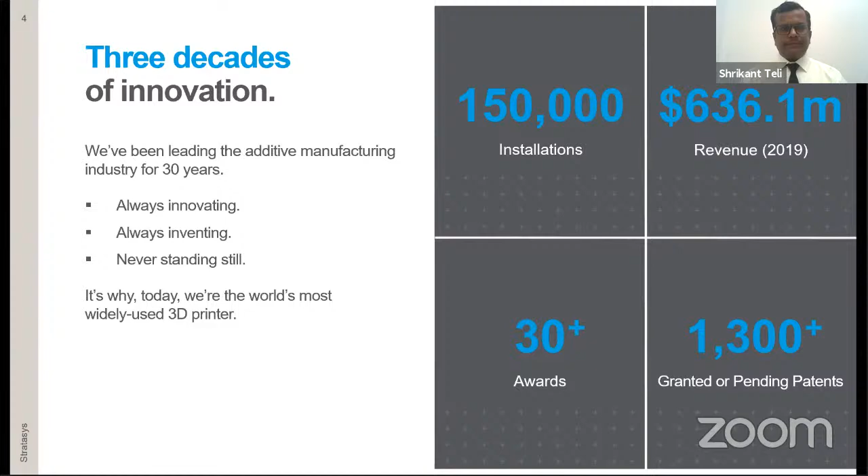Globally, we have more than 20,000 plus customers, catering to different industries including medical and consumer durables. Of course, 3D printing is predominantly used by automotive and aerospace, but now the extensive usage during this time is not only for automotive, aerospace, and consumer durables—the medical and healthcare segment is also getting benefited by using this technology.

When I say globally 20,000 customers, in India we have been operating since last 21 years, with more than 800 plus clientele base, 600 plus customer base, and 800 plus installations.

When it comes to the healthcare segment in India, companies like Boston Scientific and Stryker are using our technology for the benefit of the community. And on the innovation side, innovative companies like GSK, Bajaj Electrical, L'Oreal, and IAB have been using our technology for more than a decade.

How our industry has helped during the pandemic situation—I would like to invite Mr. Ganesh Babu to take this ahead and explain how we have helped during this time. Ganesh, over to you.

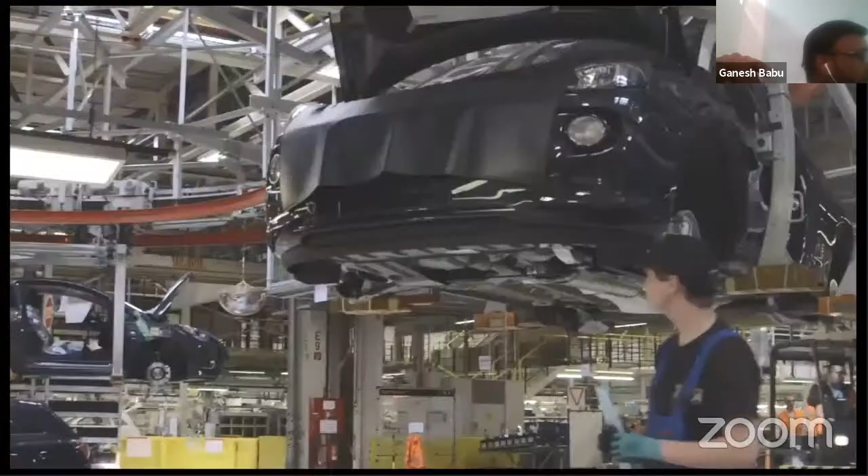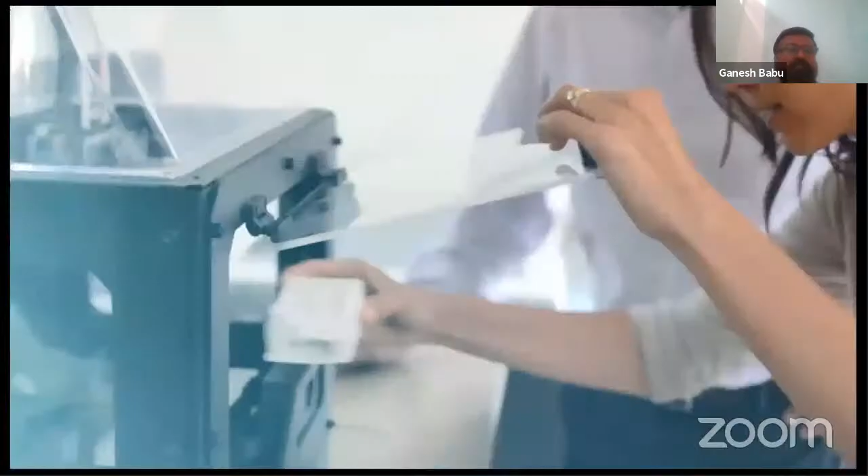To skill and industry to grow. We are shaping innovation, creativity, discovery, education, imagination, and the possibilities of tomorrow. Stratasys, the 3D printing solutions company.

I apologize for the audio disconnect due to connectivity issues, but there are quite a lot of other videos that will be relevant to today's agenda. Today we'll be talking more importantly about the current pandemic situation, which has been supported very well, and how Stratasys has been a front runner in coming forward to associate with partners and customers, providing necessary digital data files or CAD data and supporting in printing parts used either for face shields or for PPE equipment. There's quite a lot we are going to take a look at in today's overview.

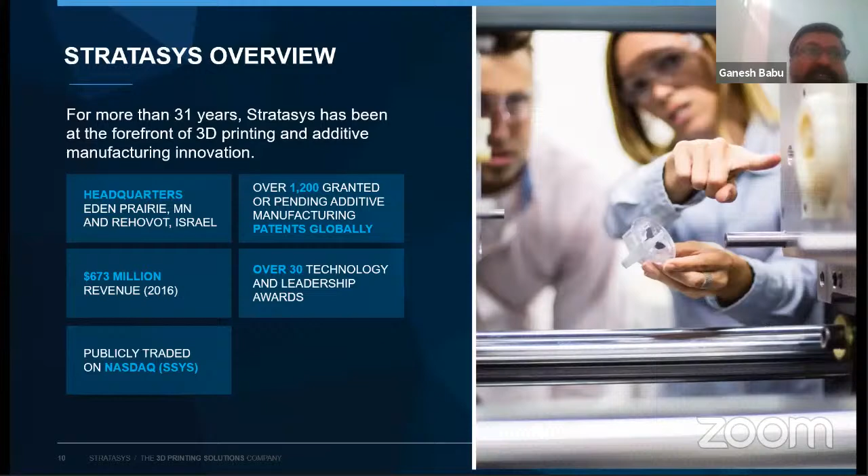Just to add to the Stratasys overview, over 3+ decades with dual headquarters at Eden Prairie, Minnesota in the US, and Rehovot, Israel. We have dual technology offerings from Stratasys—both core technologies for additive manufacturing that complement each other, and more importantly, bringing that Indian touch to whatever Additive has been doing.

Here we have the tallest, grandest Iron Man, our Sardar—this statue. Before even the consummation of this particular statue happened, we were able to use Stratasys technology to print a scaled down model and present it to the people around, who were able to keep that as a physical reference for creating such a mammoth statue.

While we talk about industry adaptation to additive manufacturing, there are endless possibilities across multiple verticals, starting from aerospace, automotive, entertainment, and the fashion industry. All of them are well associated with Stratasys technologies today, having realized the true benefits of using additive manufacturing in their line of work.

The vertical segmentation for fashion technology covers quite a lot, whether it's figurines or fashion accessories, which can be very creative. All of these are well addressed and achieved. I've got a few slides covering the fashion front as well, apart from the medical applications that will be covered in this presentation.

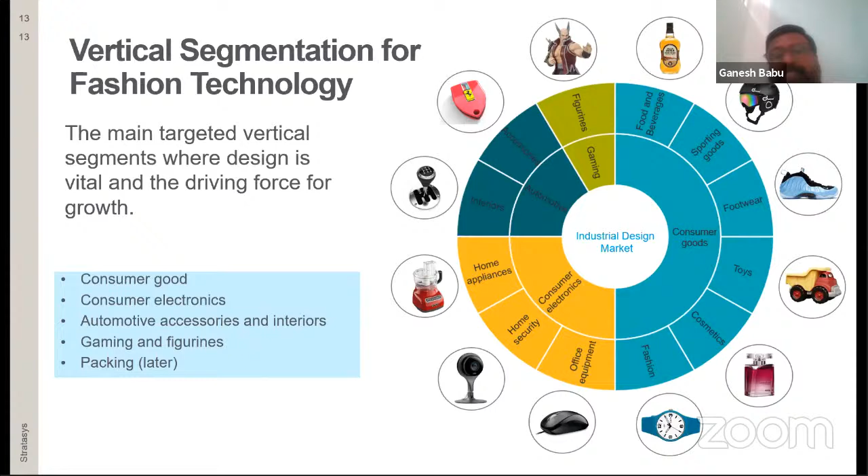More importantly, consumer goods, consumer electronics, automotive accessories, gaming, and figurines are all areas where these verticals are well supported with 3D printing.

The most important point we are going to discuss in today's presentation is that Stratasys have been first responders on the front line of the battle to stop the spread of coronavirus. While we talk about frontline support for the battle against coronavirus, how does that happen?

Looking at the supply chain, there are quite a lot of challenges. How do you overcome those challenges? How do you streamline the supply chain, since a centralized facility would definitely not be the right solution today when you look at COVID-19 support? So where and what do you need to do?

Supplier network versus centralized manufacturing sites - looking at all of this, there have been quite a lot of limitations and challenges in addressing the needs, because the lockdown has imposed stringent holdback measures. You cannot ship anything, nor can you move from one place to another. How do you address this?

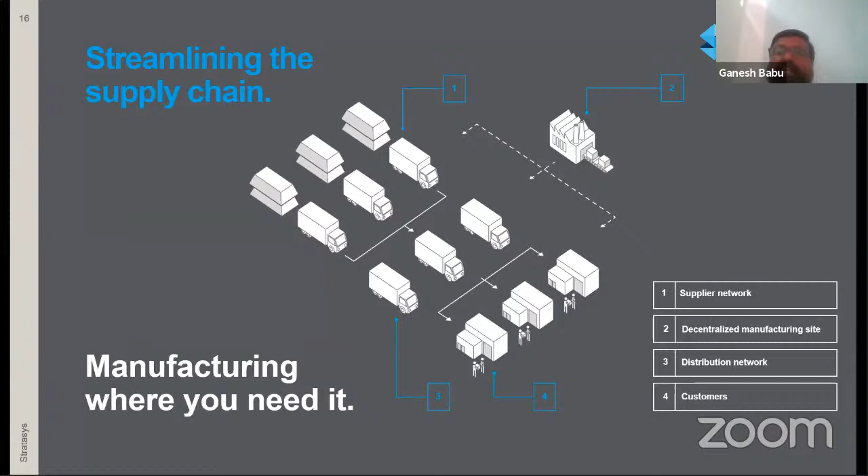The best possible way to address it is to ensure that manufacturing can begin with a decentralized facility. That's exactly what has been done by Stratasys. With the data they generated, they operated through their partners and customers, ensuring they received the necessary data and technical support. Wherever there was a need, locally at every given customer end, quite a lot of support has been generated.

One such support came from our own state of Maharashtra, at the VW plant, the Volkswagen plant. There's a video I would like to show you right now, which covers quite a lot of support generated in Pune. Let's take a look at this video now.

Not much production is taking place at any of the automakers in India because they are now dedicating their resources to making equipment for healthcare professionals. This includes masks, face shields, and personal protective equipment. We caught up with Skoda Auto Volkswagen India Limited, which is making face shields, masks, and mechanical ambu bags at its facility in Chakan, Pune. I caught up with Vasan Diaz, general manager and head of ramp-up management at Skoda Auto Volkswagen India Limited, who walked me through the entire process at the plant.

There are four items which we are working on right now, the first being the face shield. The face shield was the first requirement we received through our company, Dr. Manoj Pawar, through Sassoon Hospital. Sassoon was one of the first hospitals, let's say, in Pune, to be designated to treat COVID-19 patients.

The first product is a face shield that protects health workers from droplet infections. The face shield has an elastic band and a 1 millimeter thick plastic shield that covers the face, ears, eyes, nose, and mouth. It has a foam strip for comfort. To prevent the glue from coming off, the foam is zip tied to the shield, because the face shields are dipped in sanitizing solution often.

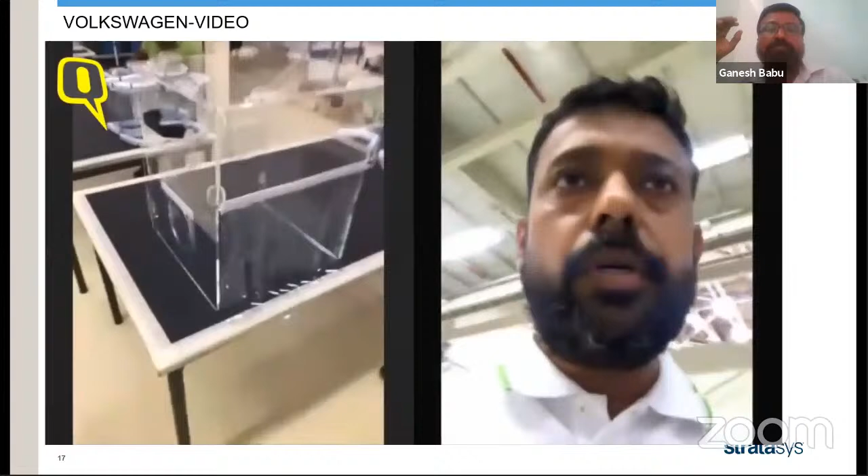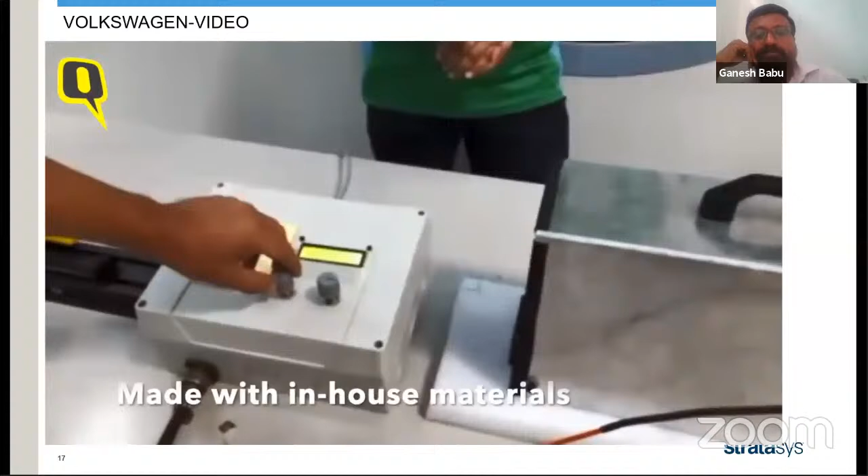We have also produced another item required by doctors inside the operation theatre, called an intubation box. Normally when they insert tubes into the patient, a lot of droplets or phlegm come out, so the doctor again needs to be protected from those things. The company is also making mechanical ambu bags which help in patient respiration. This has been built with in-house materials from the car plant.

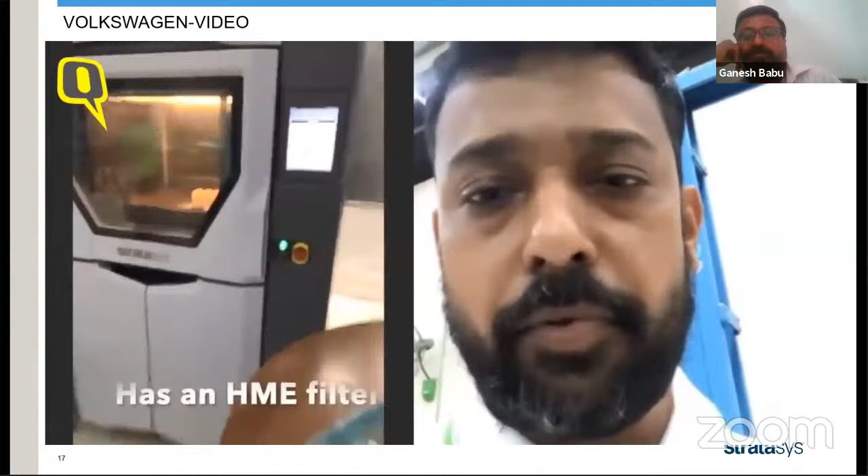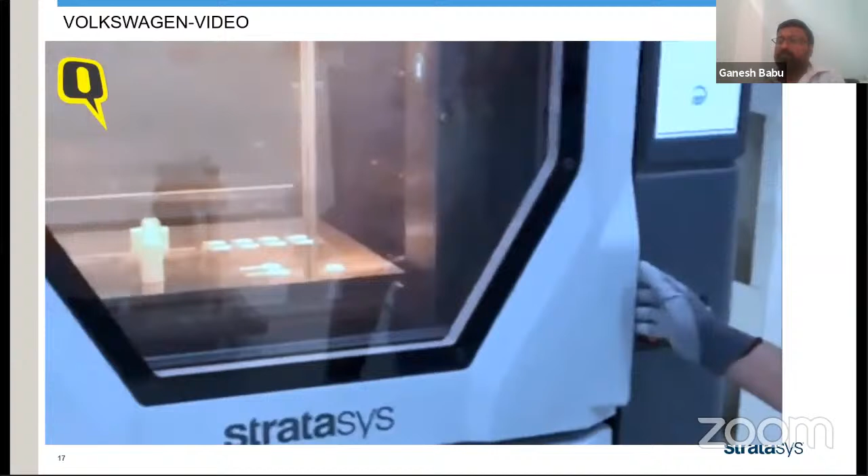The company is also making masks to supply oxygen using 3D printing. This is one of the concepts developed working together with Decathlon. We are using a snorkeling mask with an HME filter, available in medical stores or medical equipment shops. Between these two items, we are 3D printing an adapter that goes in between, creating a complete set called a filtered mask. The 3D printed part also includes a splitter so oxygen supply can be split between two patients at a time. The company will continue using 3D printing to make parts for its oxygen mask, supplying Sassoon Hospital as well as other hospitals, the police force, and healthcare workers.

That's a very interesting aspect from the automakers who have been so creative using the Stratasys FDM 450 system for printing all those support equipment for the current situation.

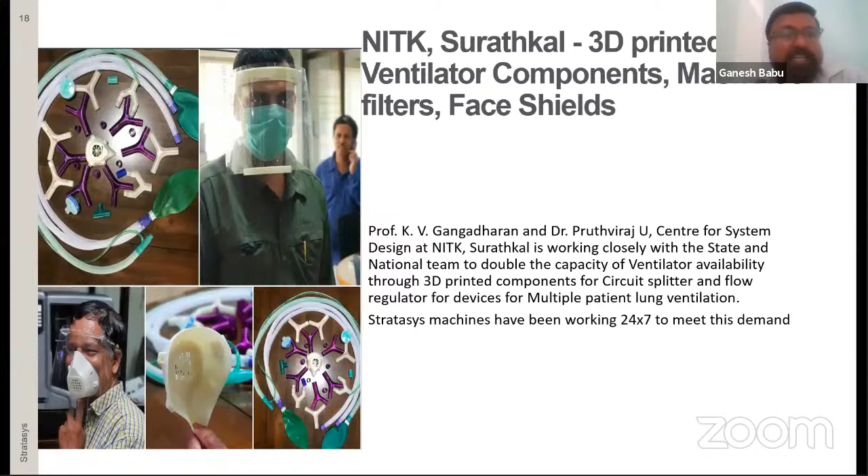Similar case studies have come from Surathkal, where ventilator components, N95 mask filters, and face shields are being produced using Stratasys patented industrial 3D printers at NITK Surathkal. Now, face shields developed at GNA University.

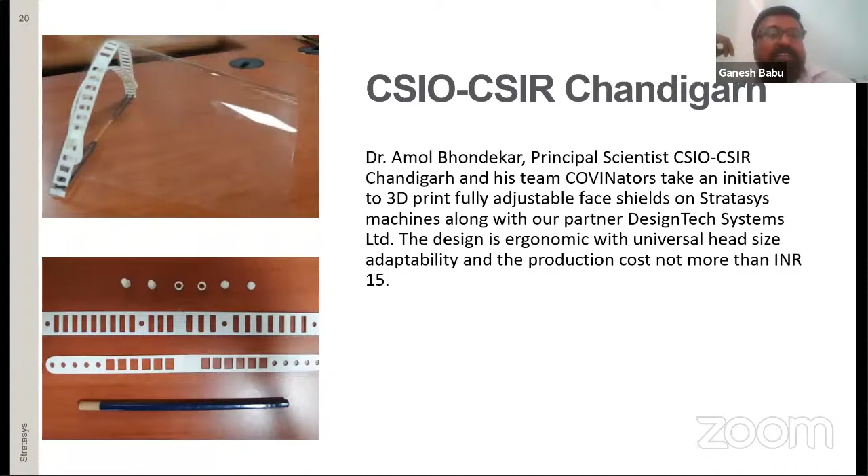Here we have very interesting data created by the designer himself. When we talk about face shields, what's crucial is how adjustments are made as it goes from a smaller size to a larger size person who will adapt and use it. More importantly, the slots between those strips are intended designs to save on the material used in 3D printing. This is a cost-effective solution that doesn't even exceed INR 15 rupees per part, and that's exactly how they've generated cost-effective solutions for wider, more common use. Ford Motor Company is also not to be left behind.

Along with GE Healthcare, Ford has been leveraging this technology for creating ventilator parts. Here they achieve air pressure without electricity, since they are operating on a mechanical device completely generated from their in-house design.

Face shields have become very regular today at most user levels. They've been able to mass produce them in continuous production. Let us remember that Stratasys 3D printers are workhorses - they can run 24/7 unattended, as long as there's a continuous supply of power and the requisite materials are loaded in the machine.

So these printers have been running continuously for 3 shifts, printing and churning out parts supporting the COVID-19 situation. Furthermore, while discussing COVID-19, let us also try to understand the major challenge.

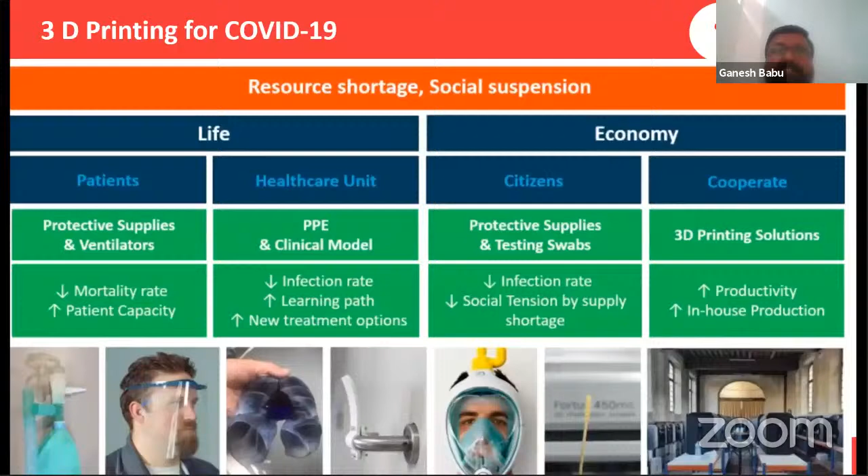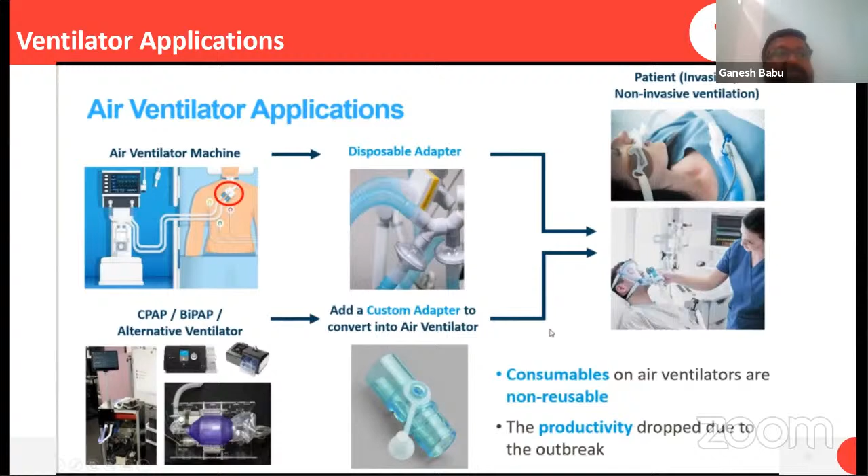On the ventilator applications, we have got the ventilator machines, which have disposable adapters. Now, these disposable adapters, at the time of lockdown, have been very crucial for supporting, for testing, and for supporting patients in hospitals. How could the supply chain be kept continued with decentralized facilities using 3D printing? That's exactly where, as a consumable, these air ventilator adapters have been printed and used, the reason being productivity dropped during the outbreak, and this has been well supported and met with 3D printing as a technology.

This is a very widely used and accepted material since it has low outgassing, no contamination during the testing, and so on. More importantly, it's a biocompatible material with ISO 10993 specifications, which have been tested for biocompatibility, and it also carries the USP Class 6 rating for medical device manufacturing. Since this material goes along with the Stratasys FDM Fortus systems, it's ideally the best fit for printing with quick turnaround. In quick turnaround time, you can print multiple nasal test swabs.

Now let us dig a little deeper into understanding what the biocompatibility is all about. It's not just the material manufacturing that talks about MED610 for respiratory device manufacturing. Now these device parts, which have been printed with biocompatible material for polyjet technologies, have been tested by Nelson Labs. Nelson Labs, after testing on the various biological endpoints, cytotoxicity, irritation details, all for the testing standards of ISO, have had a test result which has passed, and this test certificate comes along with the medical grade MED610.

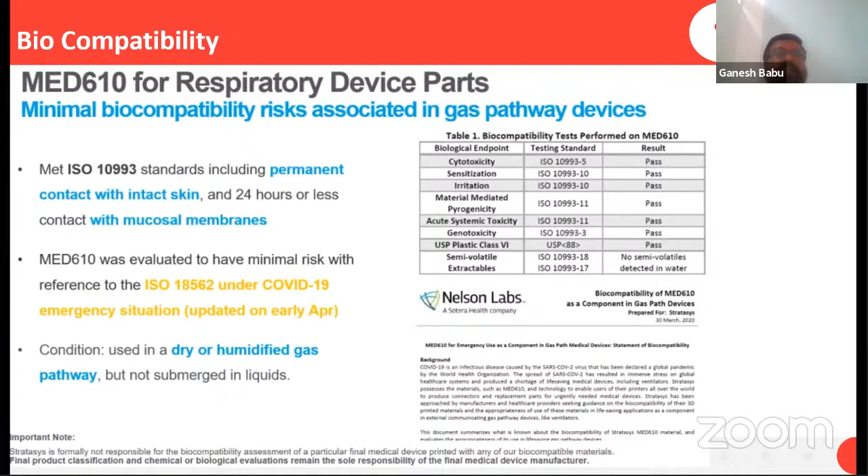Now this is the material which can get into human contact, permanent contact, without having any challenges for the humans. And when it comes to mucosal contact, it can be used for a 24-hour period. That being the case, quite a lot of areas where this MED610 material has been used for manufacturing respiratory device parts. Now comes the face shields, Stratasys face shields. What was Stratasys doing all the way at Eden Prairie in Minnesota? These have been, along with the Stratasys logo, quite a lot of fleet of machines, all going on 3D printing these face shields. Now, what is very critical is the plastic enclosure that comes along, that needs to be actually customized.

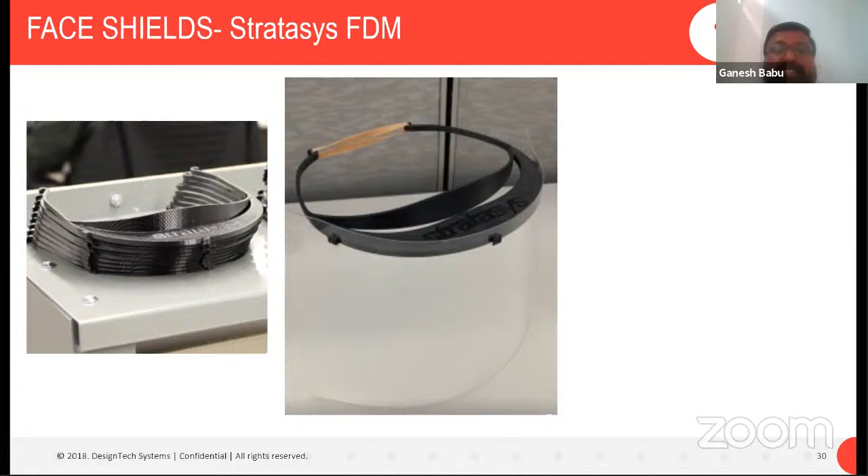This customization and design enables quick manufacturing. You can see the supplies being packed and shipped across the US, and this approach has been tried with quite a lot of products.

When it comes to more creative end-use applications, users of Stratasys technologies have created designs for wherever there's more contact, like door handles and so on. These devices have been designed and printed using durable FDM materials like ABS, which are strong and durable enough to hold and carry in your pocket.

This way, people don't have to touch door handles when opening them - just use the device to support against the door and give a push. There's a demo snapshot showing how to hold this new design of door key, and similarly door openers have been designed in various forms to avoid direct contact.

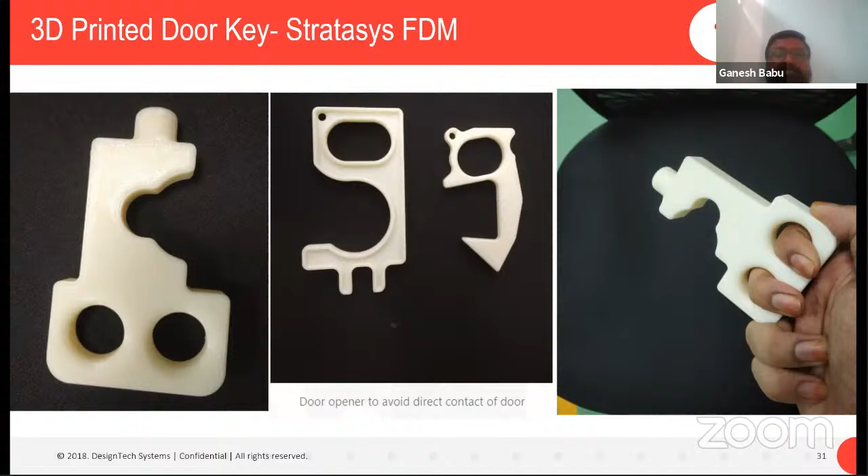And here are ventilator parts - these are scattered individual parts that have been printed. Now look at this new ventilator design, and finally I'll show you the assembly of this design, which has quite a lot of critical components.

These critical components demonstrate design for additive manufacturing - lightweighting of parts and, more importantly, complex curvatures that have been captured, with quick fabrication of all these parts using durable plastics such as ABS material, finally fastened together as an assembly.

There you see the assembly, the critical assembly, or the critical geometry parts that have been printed for the ventilator.

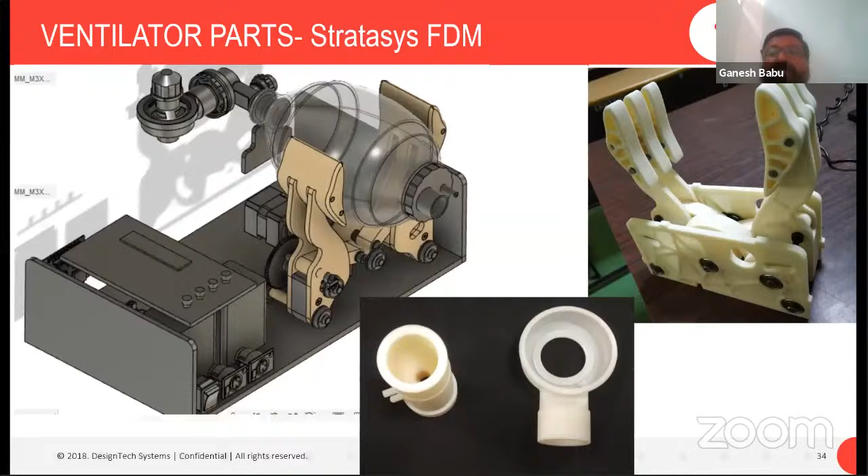In the snapshot of the ventilator assembly, only the constituting components that are complex in nature have been printed using 3D printing. The others have been fabricated with sheet metal bending and laser cutting applications. The more complex areas for the ventilator parts have all been 3D printed.

All of this has been possible only because of Stratasys technologies. Now I'm going to dwell a little more on the technologies Stratasys offers - a brief introduction to FDM and the material jetting technology called PolyJet. As I mentioned, these are two core complementary technologies, ideally.

FDM stands for fused deposition modeling, which comes with multiple thermoplastics in the form of filament brought in from a material cartridge into the liquefier zone before being extruded onto a build platform, layer upon layer. Whereas the inkjet principle works with very fine, detailed liquid material laid down as droplets on the build platform.

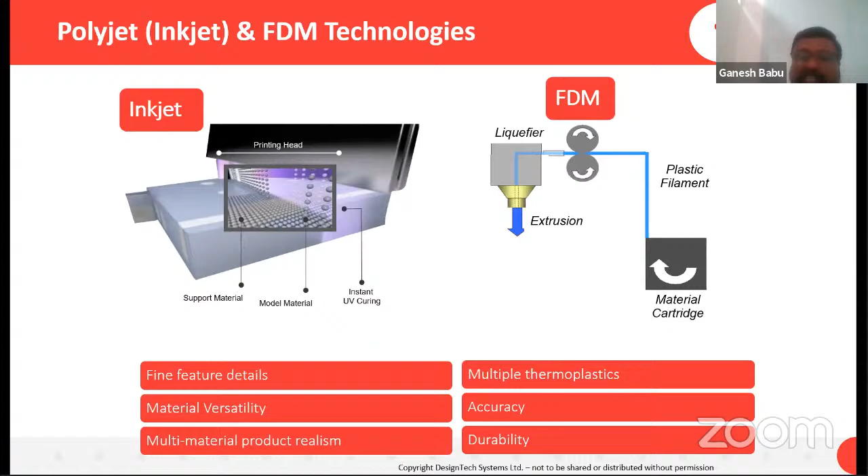You have finer layer thickness as low as 14 microns going up all the way to a standard build mode of 30 microns - fine features and multi-materials that can mix along. That's exactly a game changer today, supporting quite a lot of high-end end-use applications.

FDM as a technology works with dual tips - one for the model material, the other for the support material. The model material is the primary material the intended object is printed from, and overhang features are supported during the print process by the secondary material called support material. In FDM, there are quite a lot of materials which are soluble in nature.

These soluble materials give enhanced outputs, allowing the user to print and remove supports hands-free by dropping the printed parts into a soap-type solution where, with little agitation, it dissolves the support. Hence they're called soluble support technology, which gives cost-effective 3D printed outputs.

This is the most cost-effective solution that FDM offers today when you look at industrial 3D printing. For high strength, accuracy, durability - you name it - and low cost applications, FDM is the best choice.

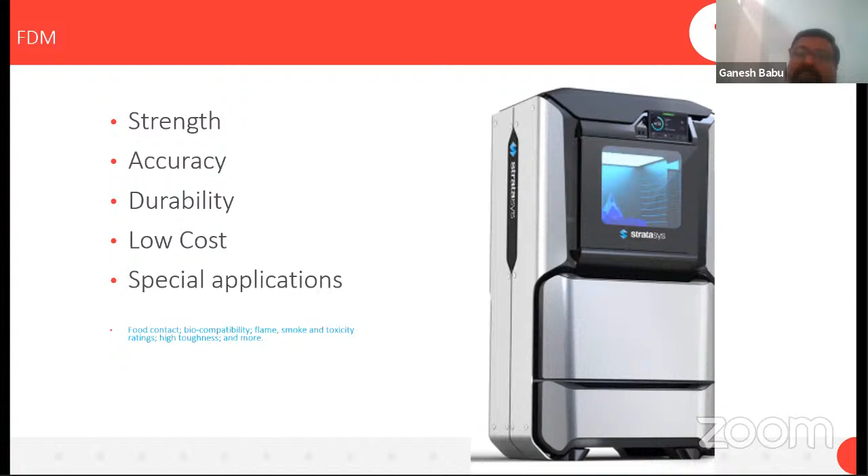FDM, the patented Stratasys industrial printer, can offer even specialty applications - food contact, biocompatibility, FST flame-smoke-and-toxicity certified materials, and many more, all working with durable thermoplastics. The material is extruded linearly along X and Y axes, with the head moving and laying layer upon layer of material.

Build thickness starts as low as 0.127 of a millimeter, going up all the way to 0.50 of a millimeter.

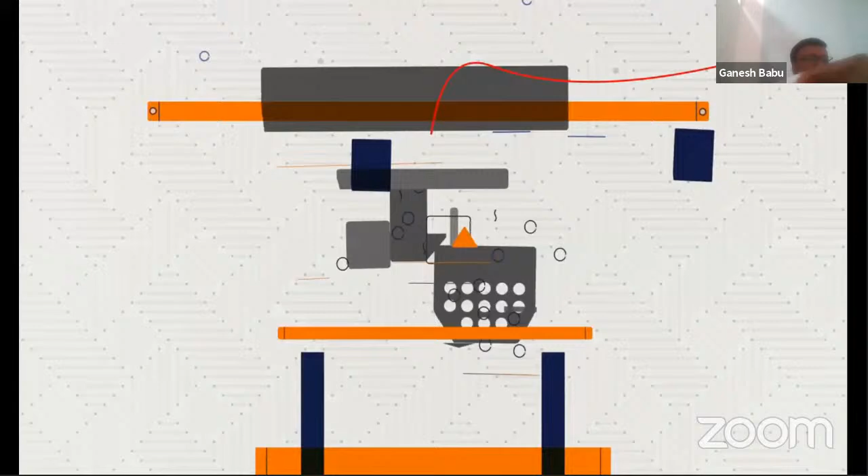5 different layer thicknesses with which you can work - that is the FDM technology for you. Fused deposition modeling is a 3D printing method that makes durable objects out of the same plastics you see in everyday products. With FDM, the 3D printer takes a spool of plastic filament, melts it, and extrudes it onto a tray to build a part layer by layer from the bottom up.

FDM materials are all industrial-grade thermoplastics. That's what makes the resulting parts so tough, and it's also why FDM is changing the way industries design and manufacture. With FDM, a designer can sketch an idea and test it the same day. Industries can cut lead times and costs. Products turn out better and get to market faster.

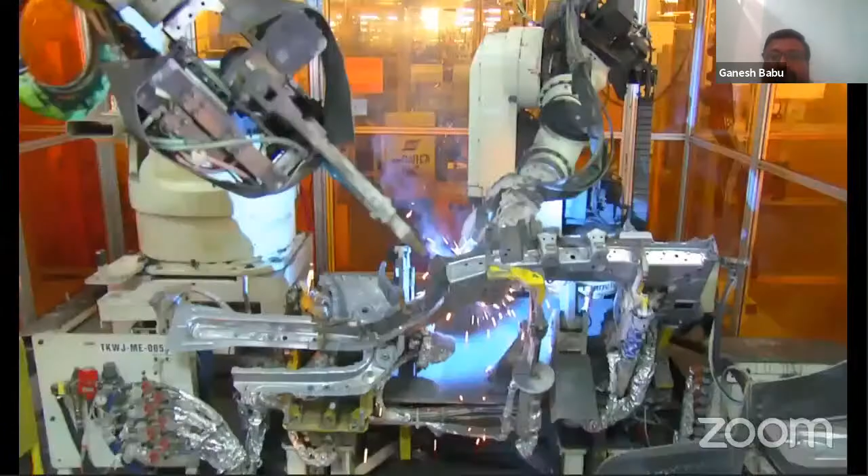FDM parts are helping to build the cars you drive. They're in the airplanes you fly in. They're in the medical devices that save lives. FDM is cutting waste in manufacturing. It's helping engineers power remote villages in Africa. It's helping farmers feed an ever-expanding population. And the ideas keep coming.

That's the FDM technology overview. It talks about the multiple verticals that it's been associated with and supporting.

The FDM product portfolio stands starting from the shared office series machines going up all the way to the production series. From a 10 cubic inch build envelope size, you can build parts as large as 36 by 24 by 36 inches on the z-axis, with multi-materials on the production series machine, such as the F900. But when it comes to even the office shared systems, like the smaller desktop machines,

they still come with two materials. Going up the ladder on the Stratasys series, you have got a wider variety of material. But let's remember that FDM allows you to work with one material at a time.

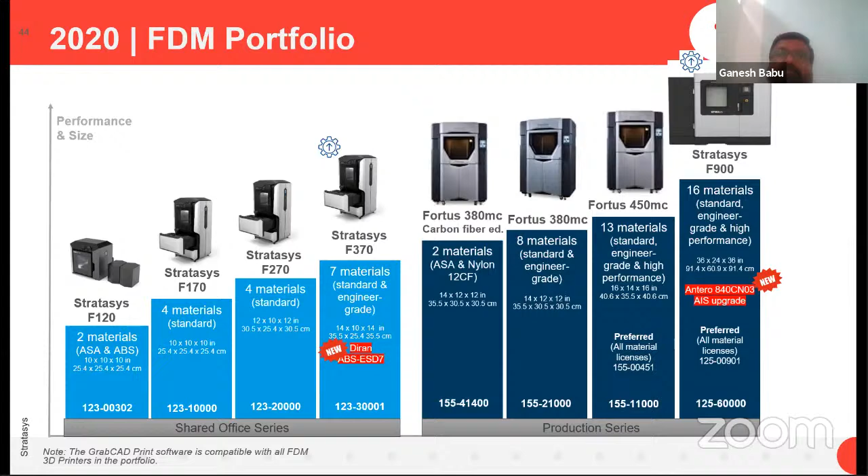The reason being that you are working in a heated and enclosed chamber. While we talk about heating for extrusion, the material getting converted into a semi-molten state before it gets extruded onto the build platform layer upon layer, it can only work one material at a time. The temperatures have to be controlled so that the output qualifies to meet more stringent manufacturing applications.

The classifications of materials: on the F170 to the F370, you have thermoplastic urethane as a rubber material. Otherwise, you have the standard plastics, engineering plastics, high performance plastics. There's quite a lot to talk about on the performance of each of these materials that cater to varied industry verticals. Let's move on to understand what PolyJet as a technology is all about.

PolyJet uses multiple inkjet heads, and each of these inkjet heads have got very fine orifice openings that dispense finer droplets of resin. These finer droplets of resin have a DPI of 600 by 600 by 1600, which means that this was for a standard 16 micron layer print. However, with the latest advancements in the technology, it offers you a 14 micron layer print.

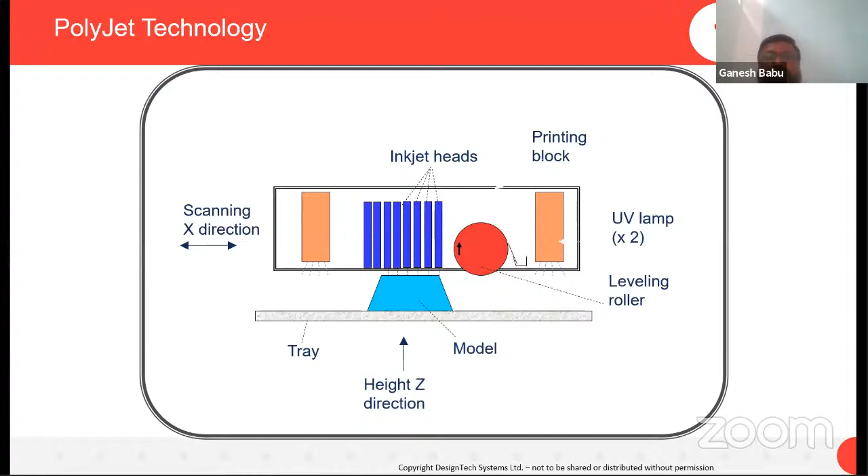You're using UV light to convert the raw materials from a liquid to a solid state. The photopolymer, which is UV curable, is what is used in the PolyJet technology. While we talk about Stratasys PolyJet, the J series is a game changer. Looking at some of the outputs from the J series, from concept to a detailed design or to a final design, all that on a single bed, multi-materials, textures, colors - all that is possible with the Stratasys PolyJet system.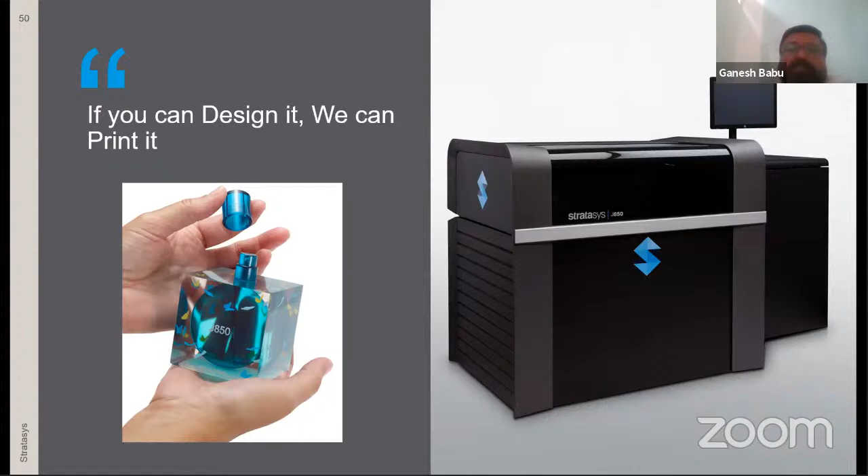Well, before that, whatever you conceive as a design, Stratasys J series printers can print for you. The PolyJet portfolio also talks about the shared office model, starting from 8 base materials for the Objet30 Pro, then 12 base materials with the Objet30 Prime. However, the recently launched shared office model is the Stratasys J55.

The J55 can work with a digital mode of mixing 5 materials together - 500,000, half a million plus colors, digital properties that you can apply and print your parts. Pantone validated, supported by GrabCAD Print.

Well, we have the Stratasys J826 and the J850 or the J835. These are for a larger mix of materials that can go along with 7 materials in a single print, and more importantly, a larger print envelope base as well.

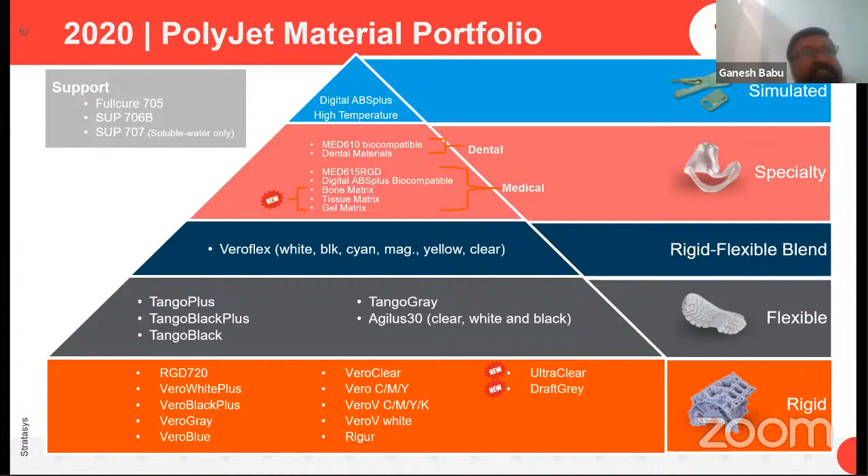The material classification has been shown here as rigid, flexible blends. You can combine rigid along with flexible materials. You will have rigid opaque, you will have rigid transparent. So all these give you enablement for achieving quite a lot of value add in printing - not just prototypes, but tooling outputs as well. Here we talk about printed injection mold inserts that get printed using PolyJet as a digital ABS material.

And finally, you have the end use parts. All that is possible only with the Stratasys technologies, complementing technologies, both FDM and PolyJet.

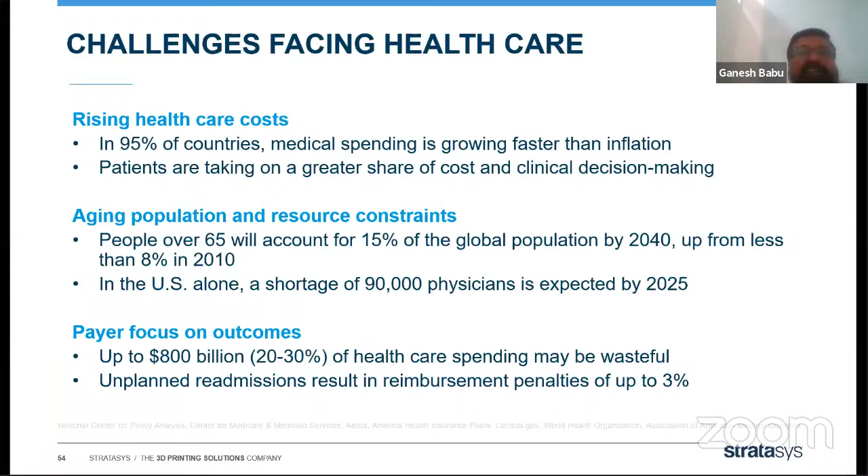Now let's move on to understand a little bit more about the challenges in the healthcare industry: rising healthcare costs, aging population. More importantly, when we talk about using 3D printing, let us ensure how this technology supports these challenges.

Here there is a case study from Mayo Clinic that talks about using 3D printing for a surgical procedure, being well practiced with the 3D printed output, and then the solutions to cater to the patient were well addressed before the surgery could begin, with the team well trained to work on the 3D printed part.

Brooke Hayes was in her 20s when the hip pain started. So I stopped doing a lot of things. Going up and down stairs hurt, walking hurt. No matter what she did, her hips hurt. And I was cutting out everything. That's not where I was supposed to be.

She is 70 pounds and had severe deformities affecting her hips with arthritis at a very young age. Mayo Clinic orthopedic surgeon Dr. Christopher Beauchamp says surgery to fix her hips would be complicated. Standard hip replacement implants wouldn't work. She needed a custom-designed surgery and custom-designed implants.

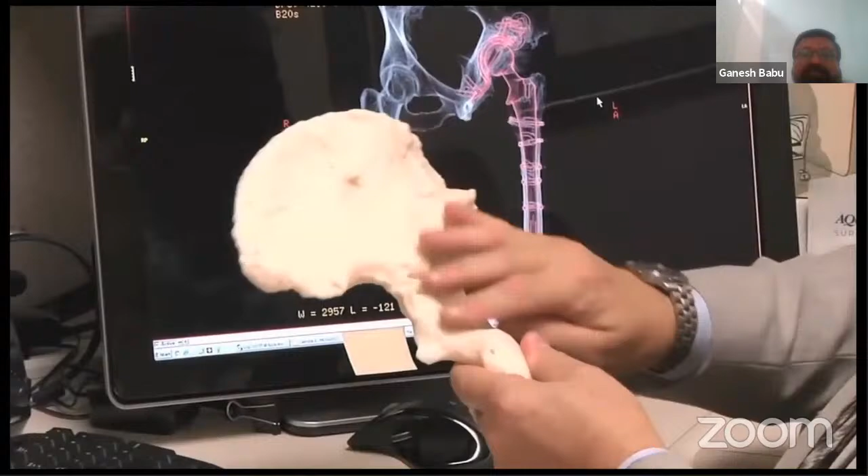The press prints a three-dimensional model. This is a printing press that takes information from a CT scan and layer by layer prints out a three-dimensional model of the patient's hip joint. We are now able to take those models and actually do the planned surgical procedure on the patient's model first, a practice run that increases accuracy during the real procedure. Then they send the model of the patient's joint to a manufacturer who makes custom-designed implants.

So that's been one of the cases where custom implants can be processed with 3D printed aid, and more importantly for surgical planning, various areas are showcased here, whether it's a heart model or the multi-material technology that supports the inner bone as an opaque material and the exterior as a clear material.

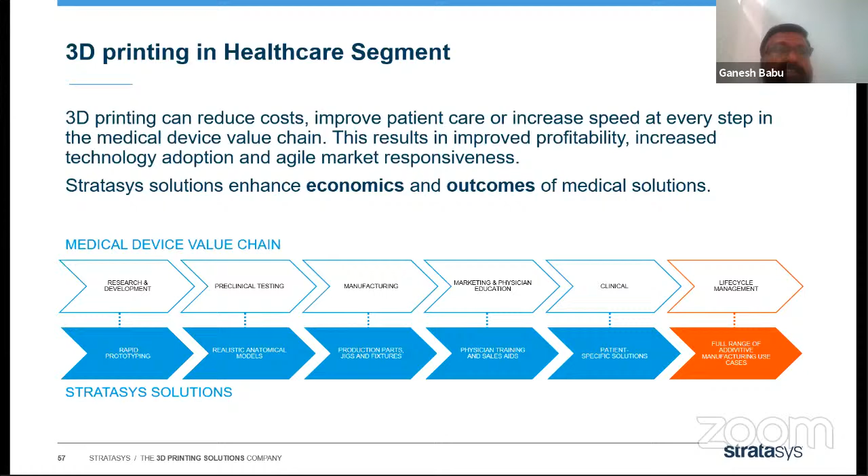There are quite a lot of challenges, and the value chain in medical devices, when compared to Stratasys solutions, is huge at various areas, whether it is R&D, preclinical testing, or clinical trials that need to be carried out, all of which can be done with a 3D printed output.

These have been case studies like saving Mia's heart. The child is holding her own heart model from an inoperable state to an operable condition only with the aid of 3D printing. That's exactly how clinical procedures have been carried out.

And very similarly, while we talk about clinical procedures, here's a very interesting case study from Dr. Bedi. Let us hear him out. Though it is a little bit of a longer video, this is a very interesting case study from India, where GNDEC and Dr. Bedi have pioneered using 3D printing for this particular challenged patient to overcome those challenges.

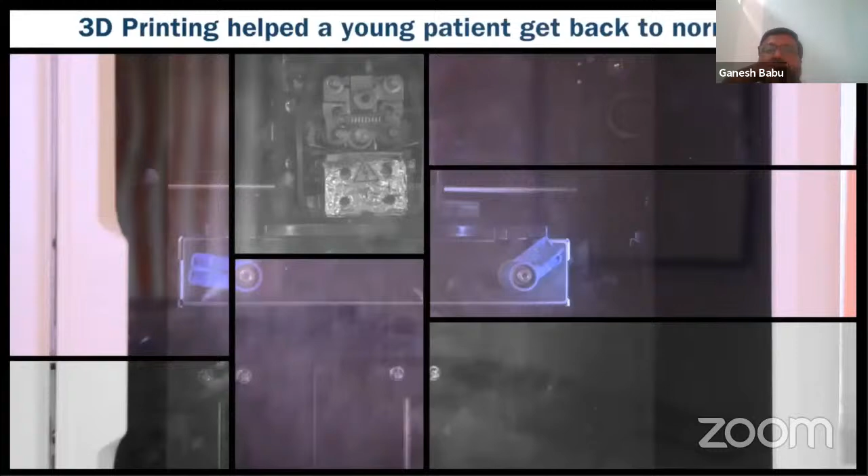This engineering college was started in 1956, and we have around 850 students at BTech level, 150 students at PG level, and about a dozen students as PhD scholars doing research in different fields. This manufacturing research lab was started in 2012, and we have state-of-the-art facilities in this lab.

Recently, I would like to mention one case. Dr. H.S. Bedi contacted us. He wanted a 3D image of the lung of that patient, and we did this work free of cost for him.

Now, my patient was a 23-year-old young man. His parents told me that he had been blue. So his nails were blue, his lips were blue from birth. And for some reason, he had gone to doctors, but he had not been diagnosed.

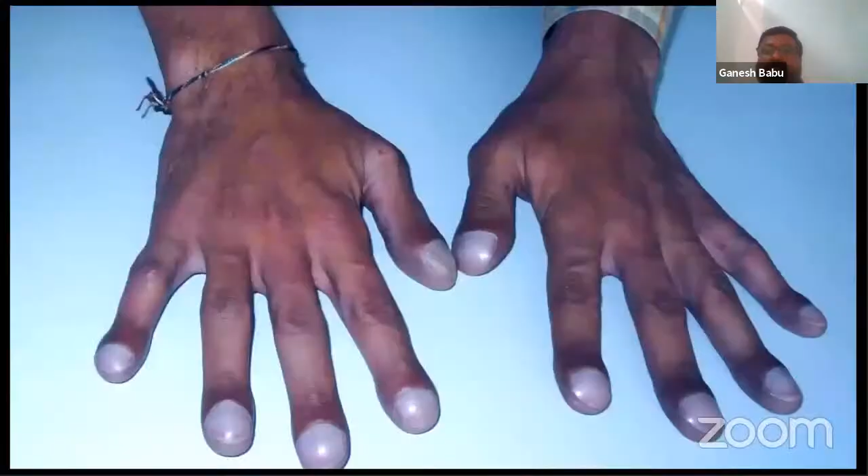But then when he came to us, we investigated him. We found that he did not have any heart disease. So his heart was normal, which is very rare to have a normal heart and still be blue.

To be blue means blood was going to the lungs, but instead of going into the lung where it would have picked up oxygen, it was coming back to the heart without picking up oxygen, because there was this malformation, this mass where the blood was recirculating. That's called an arteriovenous malformation, a pulmonary arteriovenous malformation.

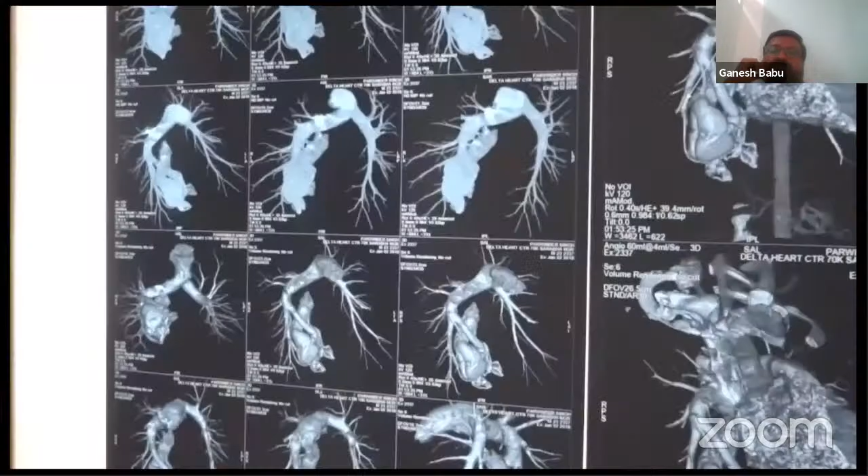Because on the CT scan, it looked like a very complex lesion. There were multiple branches of the artery, multiple branches of the veins, and then in between there was lung tissue which was being bypassed.

An X-ray and a CT scan are only two-dimensional pictures. So then we got to know of Professor Binder, and we came to know he was doing some work on 3D printing. The doctor approached us with the 2D images, which were basically CT scan data.

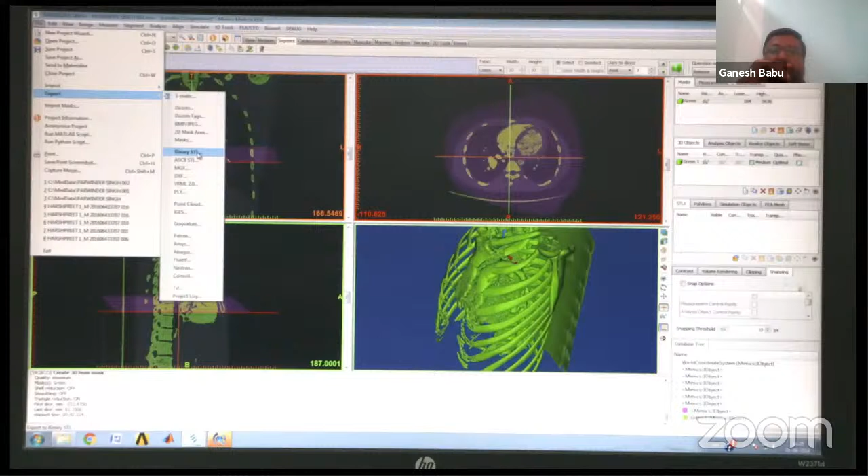We used that actual data in consultation with the medical practitioner, the surgeon. We used standard commercial software for converting the DICOM images to an STL file, and those files were actually printed on the uPrint SE 3D printer. Now I'll show you the print.

So this is the 3D print, and all these branches are exactly as they are in the body. It is very precise, very accurate, down to a fraction of a millimeter.

If we did not have this view, this knowledge of exactly what is the length and width of this, but in the actual patient there is lung tissue on top of it, so to get there I would have to dissect blindly.

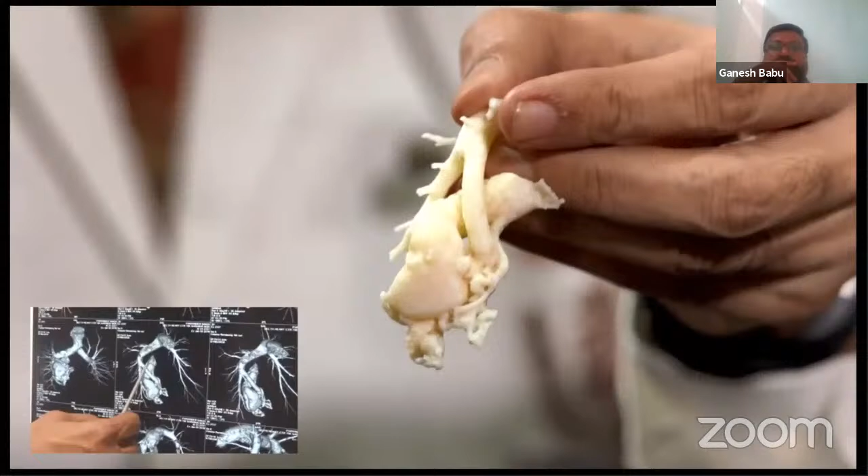Now because I know exactly how deep it is, I am not that blind. I am able to visualize in my brain that this lesion I am going to is exactly 1.25 millimeters deep, so I will not damage any tissue. In conventional surgery, I would damage more normal tissue because I don't know what is lying there, and I'd have to dissect without knowing exactly.

I would have needed to go very, very slowly because I could not see through the blood and the lung. But because I could see through, because I had this model in my hand, present in our operation theatre, it took us only about 1.5 hours — something that would have taken 4 hours.

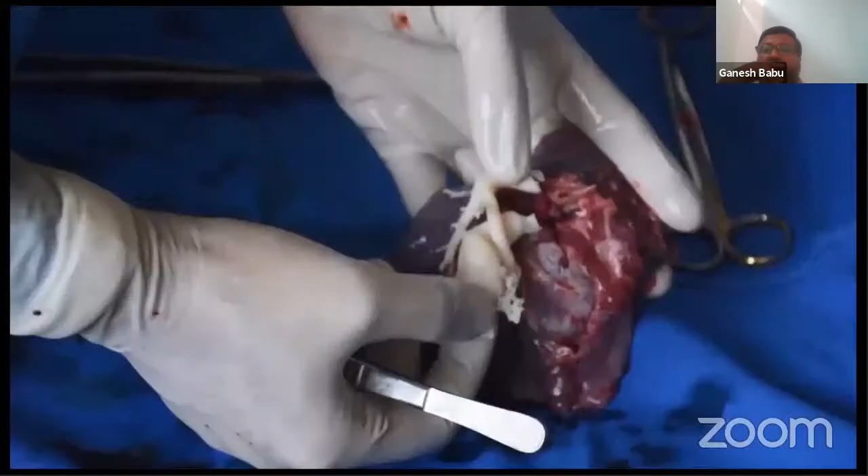Because we had absolute knowledge of where the artery is, blood loss was next to nil, maybe about 100 ml, while otherwise blood loss would have been much more and we would have needed maybe 2 units of blood. In this patient, we needed no blood.

The patient had seen this lesion, so in his mind he was clear about what surgery was being done, and he knew both the advantages and the risks of surgery. So did his parents.

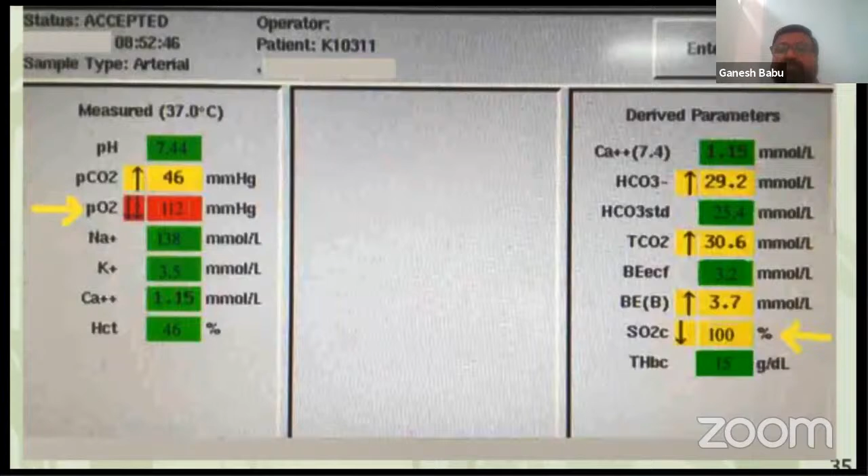The moment we clamped this, his oxygen came back above 100 immediately, without doing anything else. This was a great boon to us, and the patient recovered. He was wide awake after the surgery was finished, and within 2 days we were able to send him home. His nails, you will see, are absolutely pink.

So it's a great help for society and the medical fraternity with respect to the usefulness of 3D printing, and in future we are taking up such cases. After this surgery, we got 3 more cases from PGI Chandigarh of small kids less than 1 year old who have some sort of blockage in their heart, and we want to actually print the blockage part.

So with this, we move on to what the digital anatomy solution is all about. Using the desktop printer today, Dr. Bedi and his team were so successful in treating a patient with such a challenging condition.

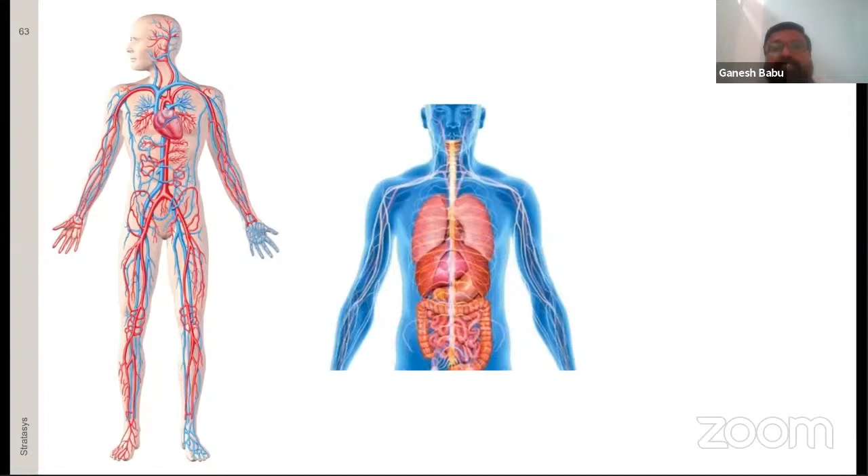The DAP solution addresses the cardiovascular system and the gastrointestinal systems — all of these are well addressed. Or if you have to print bone sections, yes, you'll be able to achieve those hard bones covered by the periosteum, the softer tissue, along with the spongy bone or hard bone and the bone marrow, all of which can be addressed and printed.

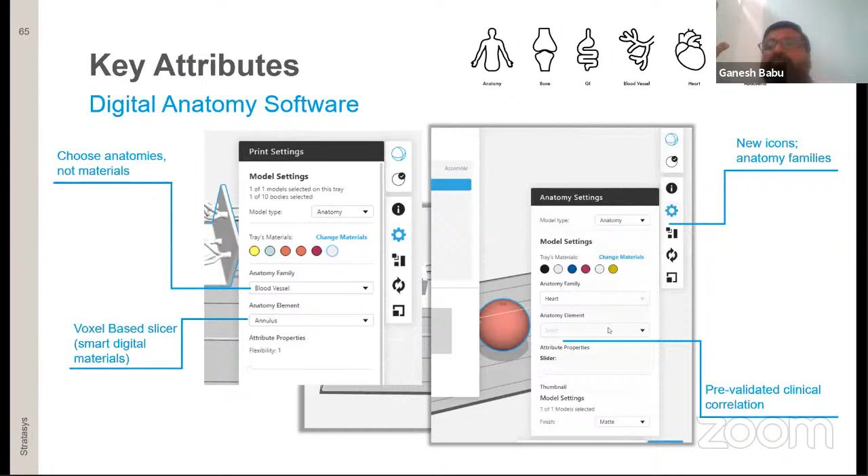The key attribute that supports this is the GrabCAD print — whether it's blood vessel printing or bone models, all are well addressed. You get to see a single section with the myocardium, the vessel walls, and the various soft tissue areas all addressed and well supported by the software. This game changer, the J750 digital anatomy printer, helps in printing quite a lot of abdominal aortic aneurysms.

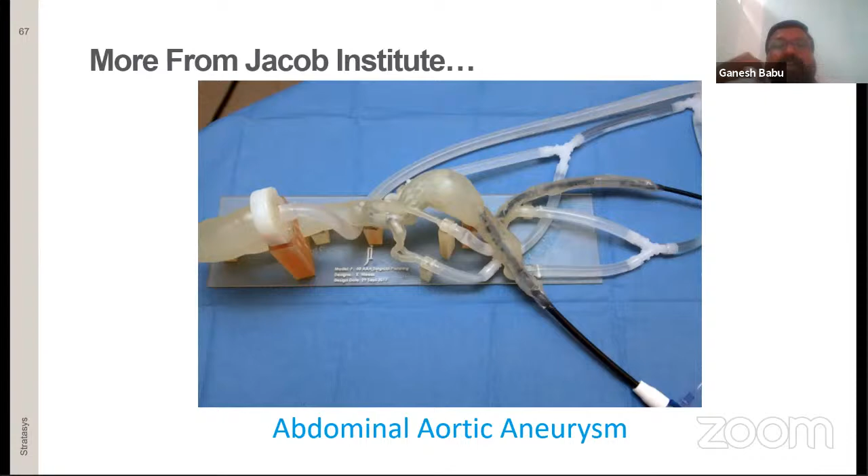From the Jacobs Institute, there are a number of case studies today we could talk about, but due to time constraints, let's move on to understand where 3D printing could also associate with and enable the fashion industry.

The fashion industry adopting 3D printing has been going on for quite a long period of time. It's been more than 7 years since Stratasys's PolyJet technology has been associated with the fashion industry. Here are some fashion industry accessories well supported with 3D printed outputs. More importantly, complex designs that were conceptualized but unable to be manufactured by traditional subtractive techniques.

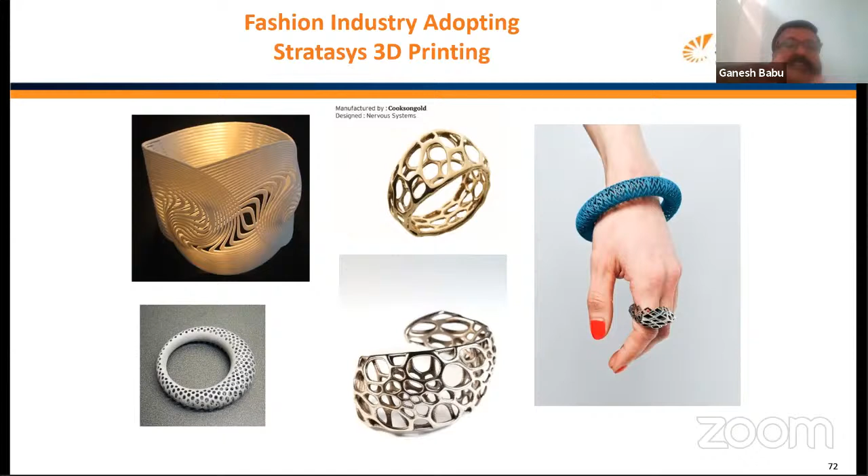It's only 3D printing that can support such exclusive, customized designs, whether it's footwear or other creative and customized designs. Think about the designs by Sebastian printed on the Stratasys 3D printer. All these creative outputs are only possible with Stratasys's multi-material technology because it gives you texturing and a lot of fabric-like effects.

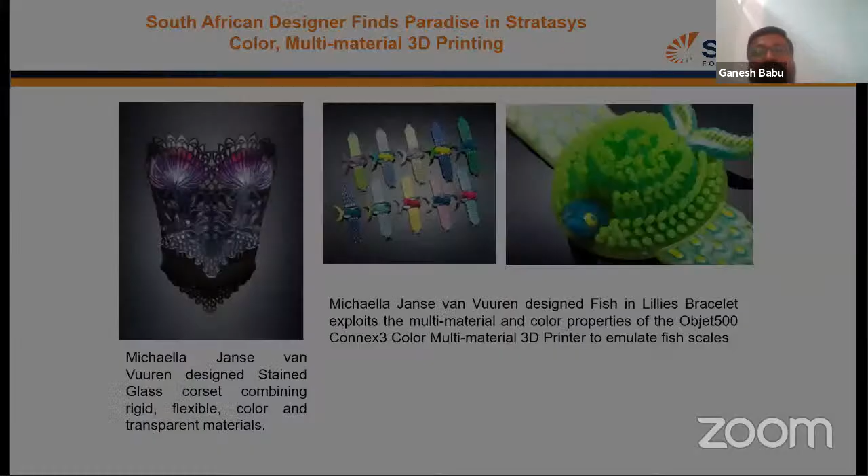The J750 or J-series machines, from the J750 onwards, J835, J850 and J826, all enable you to have 100% product realism. That's exactly what you get to see, from concept realization to realizing your end products in a single go.

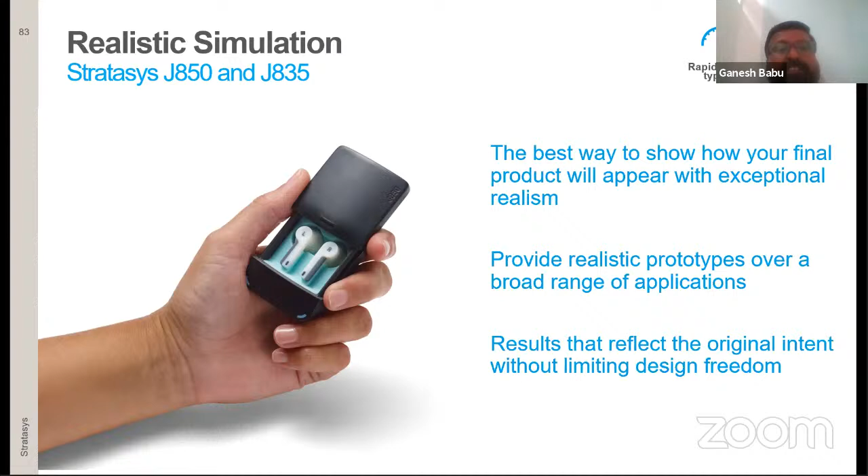Whether it's the ear parts with text, logos, colors, or labels, all these are single print outputs from the PolyJet. Since they work with vivid colors of material - magentas, vivid yellows, and vivid cyans - they can give you texture simulation, leather output simulation, fabric-like jeans, etc. All of these are possible to print in a single go.

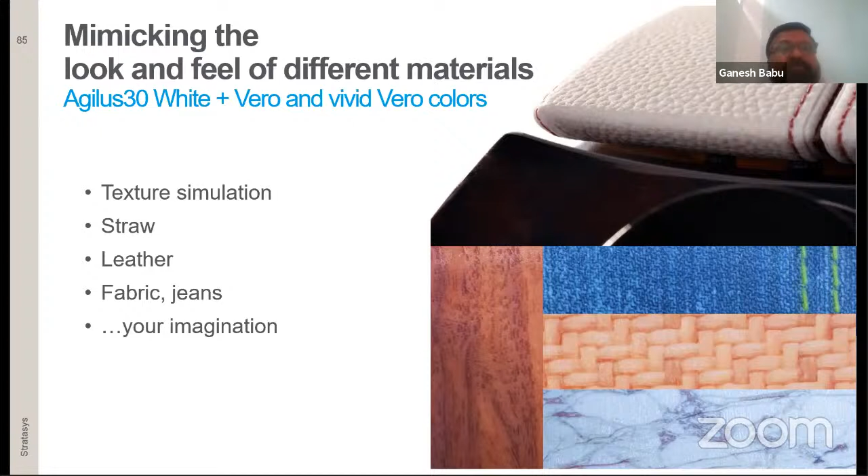Talking about the associated software that comes with the printers, there's GrabCAD Print, because the complicated traditional process to achieve your design intent as an end reality is so very challenging. GrabCAD Print gives you an easier and smoother workflow, and that's how we get to work with various software.

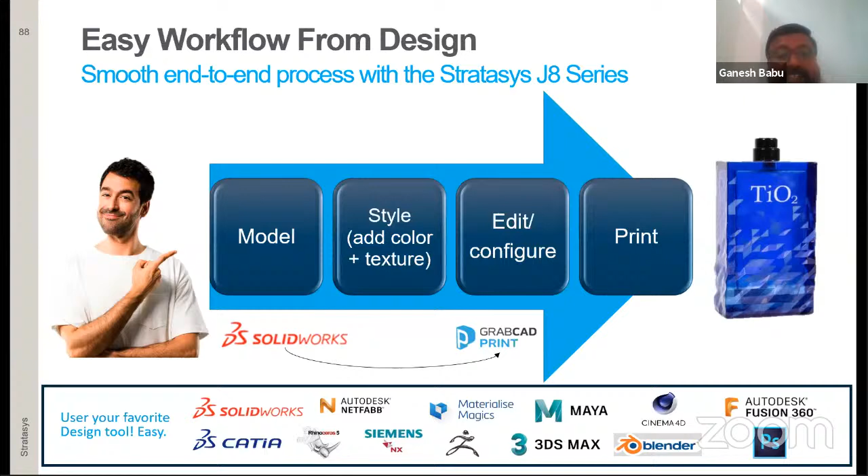Today there are multiple softwares, whether it's Maya, SolidWorks, or CATIA. GrabCAD Print can also associate with KeyShot as well as with SolidWorks, to ensure that whatever design you intend, whatever colors you've adopted, can really be achieved with Pantone-validated colored parts.

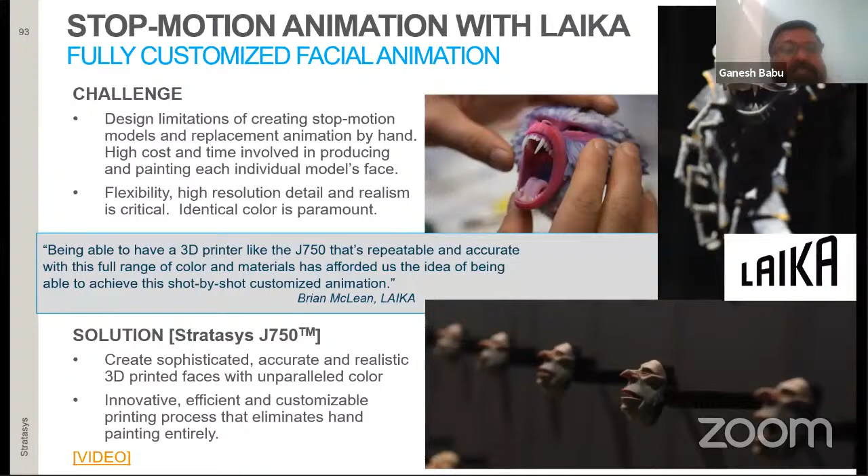It's truly a game changer when it comes to the animation industry. Here we have Laika Studios talking about fully animated outputs. All these animated facial animations, created with PolyJet multi-material, enable animated movie manufacturing which was earlier impossible to carry out. Some of the characters here are true representations of what the printers can deliver in terms of the intended output.

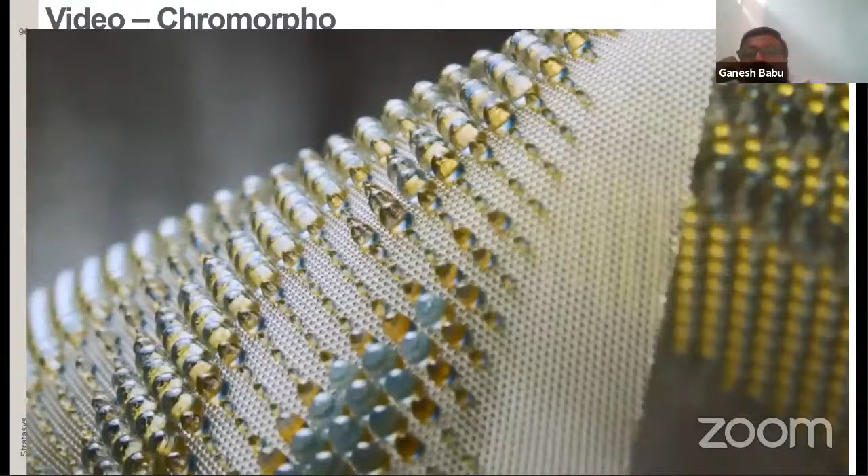The approach was very different this time. 3D printing has been used in fashion for years, but this time it's a different approach because the printing goes on the surface of the fabric. What we want to do with this project is allow the textile to carry the 3D print, like a fish would carry its scales on its skin. The Chromorpho collection is about color and morphology - how does color change through movement?

We started to research different butterflies. We were fascinated with the iridescent patterns and geometry of butterflies, and how animals and insects in nature use their skin and movement to generate color. When you zoom into these insects and animals, you discover they don't use pigment, they use a microscopic structure. Nature has a morphology solution to generate color.

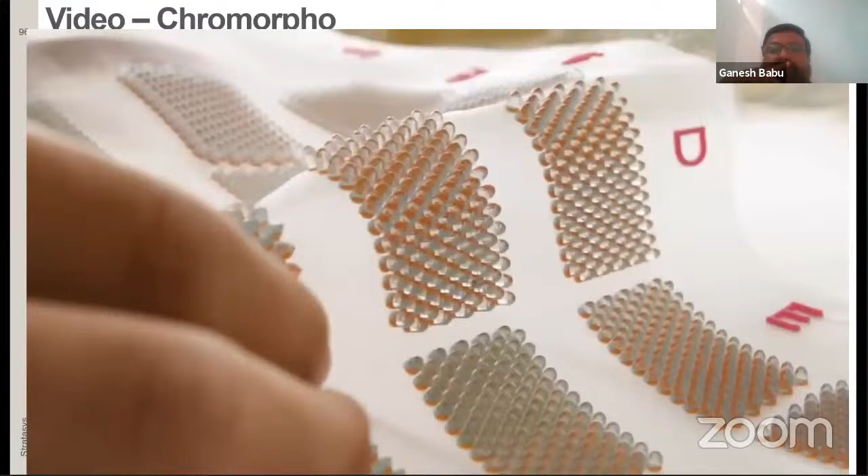Stratasys was really interested in exploring the idea of a lenticular lens. It's a small, plastic, translucent dome that bounces light through the lens in a way that if you look from one angle you see a certain color, and from a different angle you see a different color.

Since we're printing in this cellular method on a fabric, we're able to print a lenticular lens as a whole collection of little islands on a piece of fabric, so it's fully articulated and flexible. Each print has thousands of little cells. The overall garment is made of 100 to 200,000 lenses on it.

The way it's put together is completely traditional, with a sewing machine, binding, and a zipper in the back. It's like a puzzle, you have to put all the pieces together. But the textile itself is completely new.

We truly believe that integrating 3D printing in very thin and fine layers with the textile, we're able to have solutions that are very appealing for the fashion world.

This dress represents to me the perfect balance between craft and technology, the idea of using this new technique that Stratasys is offering, where you can see a transformation. There's something very magical and very special about this.

The Chromorpho collection continues to evolve. There's another dress that we're going to show at the Philadelphia Art Museum, a collaboration with Julia Perla, another version of our game with butterflies and insects. Next year we will launch two other evening dresses with Assemblies Architects and with Neri Oxman, and more designers will join the creatives that work with us on this.

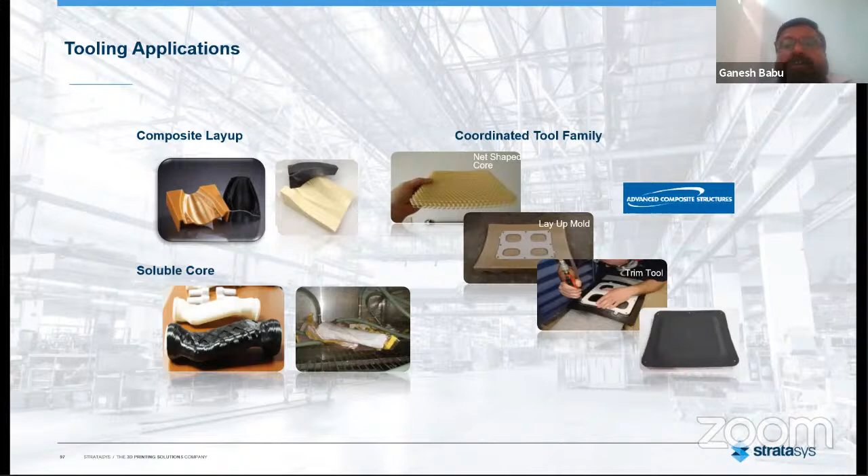Today, tooling applications are also well supported, whether it's composite layup tooling, soluble cores, or the coordinated tool family for the aerospace industry. We have tooling solutions for the assembly and automation line, metal forming applications using plastics, and thermoforming applications for plastics.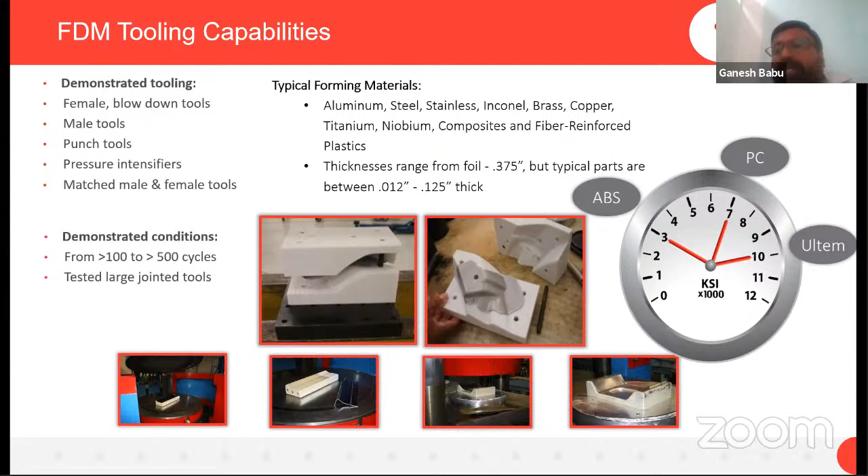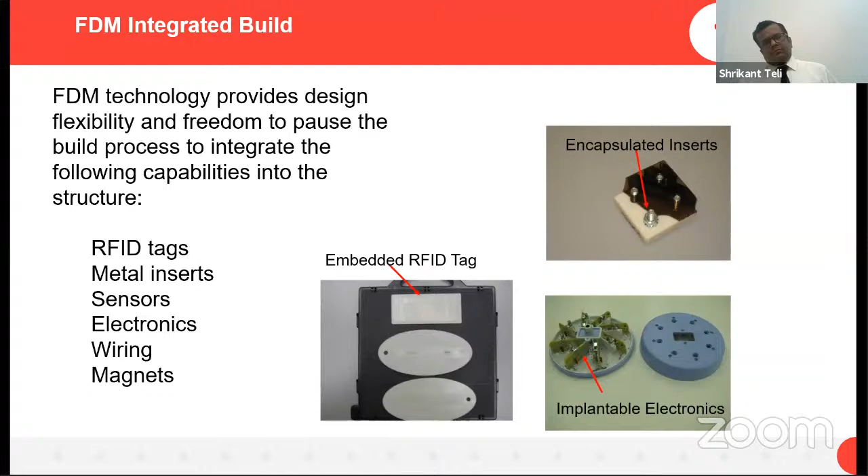Quite a lot to talk about with 3D printing using Stratasys, endless possibilities. This is an area where you need to think beyond prototyping - whether you're using ABS, polycarbonate, or Ultem, each has unique compressive load bearing capabilities enabling applications such as casting, thin skin composites, mold inserts, printed injection mold tooling, or inserting magnets, sensors, metal inserts, RFID tags during the print process, all with special considerations working with Stratasys technologies.

So multiple benefits, whether talking about lattice structures, filigree structures, or complex honeycomb, all are possibilities. Before I summarize, here is a final video which talks about Industry 4.0 and 3D printing.

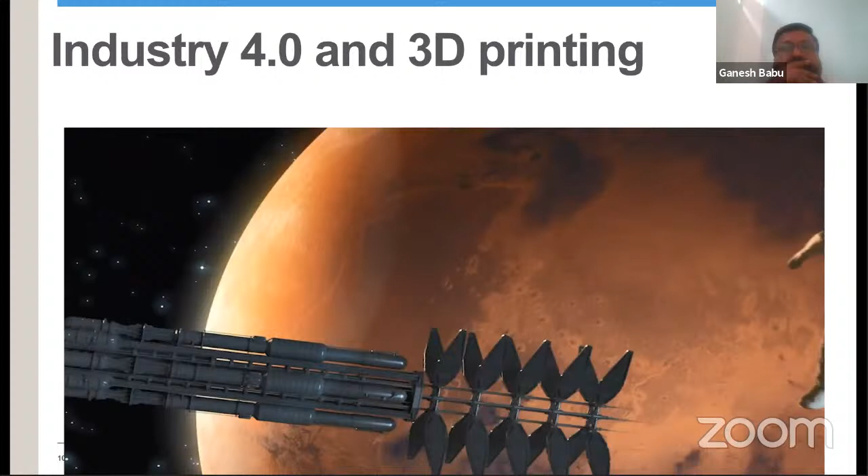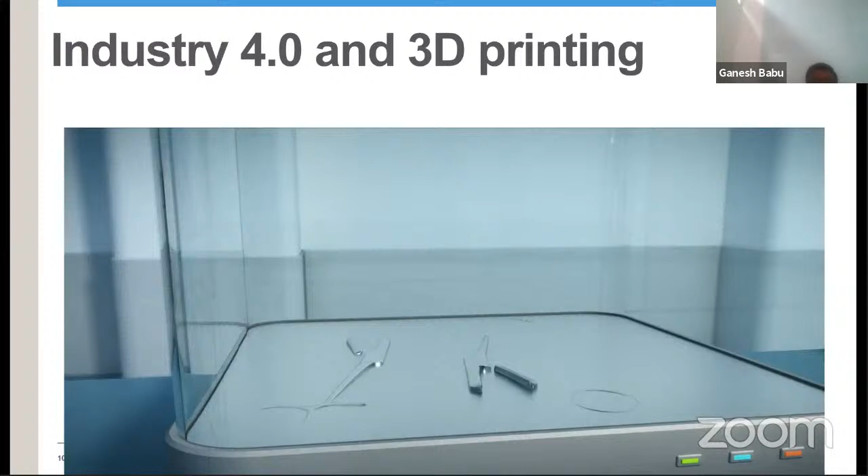Imagine a time when intrepid astronauts traveling through space make their own 3D printed spare parts, while self-managed machines design and build whole 3D printed habitats on distant planets. Or when medical practitioners 3D print accurate models of intricate human organs and complex specialist devices for use in surgery preparation and training. Well, imagine no more. In the era of Industry 4.0, 3D printing has firmly combined with ultra-fast data transfer, cloud computing, and artificial intelligence to revolutionize the way we do business and the way we live.

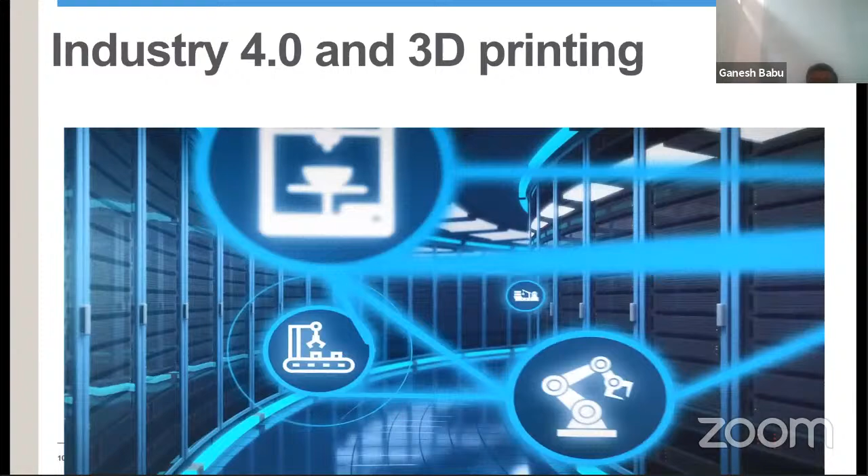In the last 30 years, 3D printing has progressed all the way to high-volume manufacturing, and Industry 4.0 is dramatically expanding its possibilities in a way that is both rapidly scalable and cost-effective. High-quality products are being designed, trialed, revised, and manufactured in a fraction of the time required by existing methods, enabling the decision-making process to become increasingly decentralized.

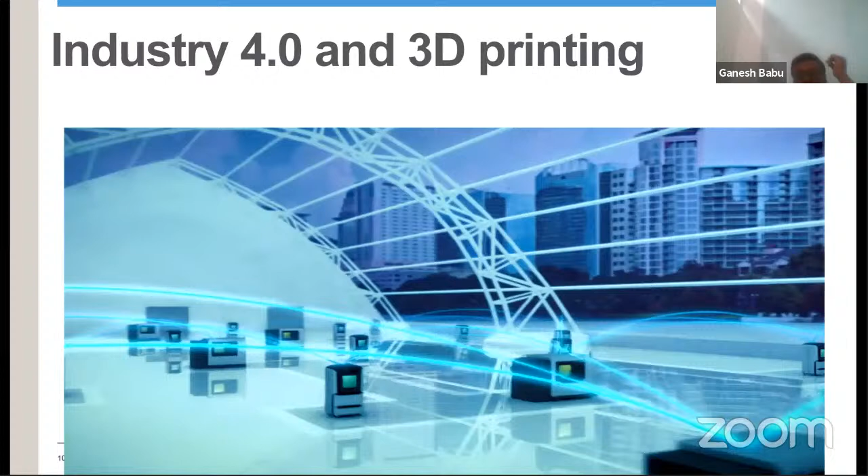With its high-speed connectivity, 3D printing provides industry with instant and responsive solutions. Assembled components can be made to order and produced locally, significantly decreasing the number of suppliers and labor units, and eliminating tooling costs. In creating new market opportunities and revenue streams, the adaptive flexibility of 3D printers offers manufacturers more choices in making design and business decisions.